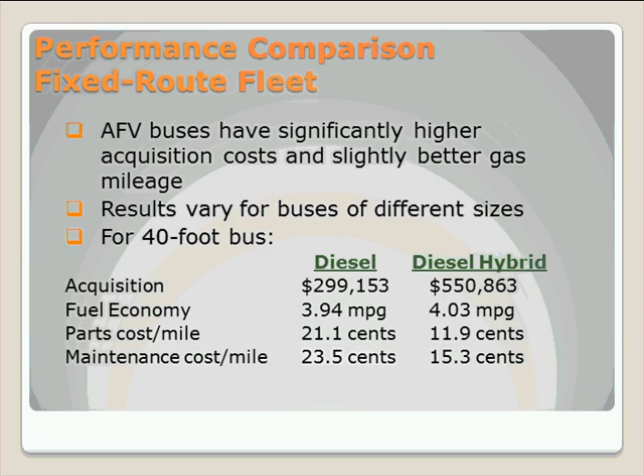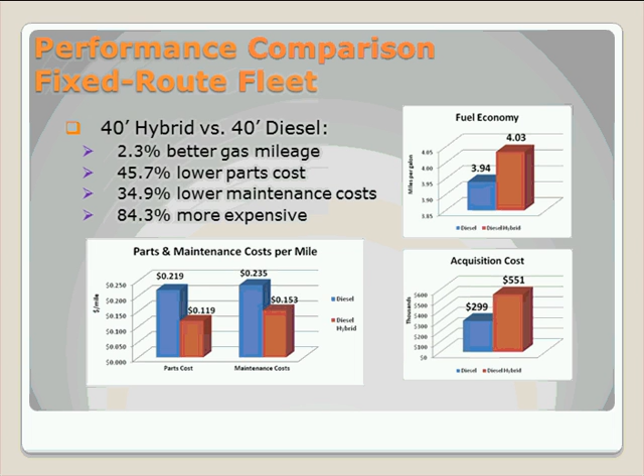Now this is the same data in relative terms, in percentage terms, not actual numbers. In relative terms, the hybrid buses provide about 2.3% better gas mileage. They also have 45.7% lower parts cost and 34.9% lower maintenance costs than diesel buses, while at the same time the hybrids are 84.3% more expensive to purchase. So this is the comparison for 40-foot buses.

Now, if you look at the entire fleet of diesel and hybrid buses, regardless of size, you'll see that hybrid buses are on average 5% better on gas mileage compared to diesel. The hybrids also provide 57% lower parts cost per mile and 36% lower maintenance cost per mile, but at the same time they cost more than double compared to diesel.

But we also had to account for the age of the bus. It turned out that the hybrid buses are also much newer than the diesel. The average age of a diesel bus was a little over 6 years versus less than a year for diesel hybrid. So this can explain some of the variation in performance.

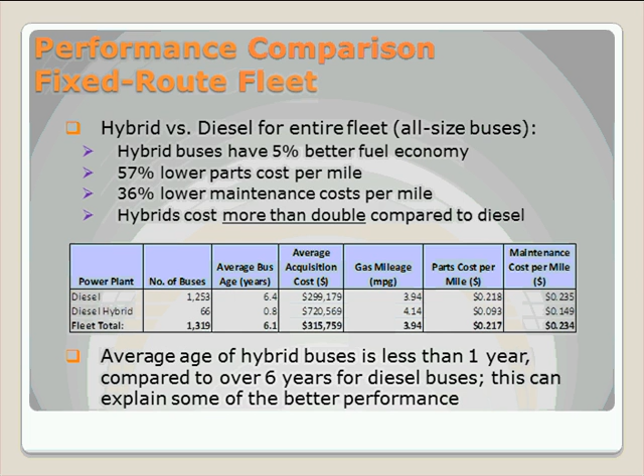In addition to data on fixed route buses, we also tried to collect relevant data on demand response vehicles. Unfortunately, the data on performance and operating costs of demand response vehicles were not available. So all the data for paratransit vehicles was obtained from the statewide vehicle procurement system, called TRIPS. The TRIPS database has a lot of useful data on paratransit fleet, including fleet characteristics and vehicle acquisition information, but there are no records on operating costs. As a result, the analysis of paratransit fleet is a little bit limited.

The data on paratransit fleet is presented separately for vehicles acquired with and without federal assistance, as they are distinguished like that in the database. Vehicles acquired with federal assistance are designated as the FTA Section 5310 program, and those without federal assistance are non-5310.

For vehicles acquired with federal assistance, gasoline fuel was more popular than diesel. There were twice as many gasoline-powered demand response vehicles reported in the database than diesel. The data also indicated a trend of increasing percentage of gasoline-fueled vehicles in annual acquisitions from 2007 to 2011. For example, if in 2007 the purchases of diesel and gasoline vehicles were split 50-50, in 2011 these purchases were 8-to-1.

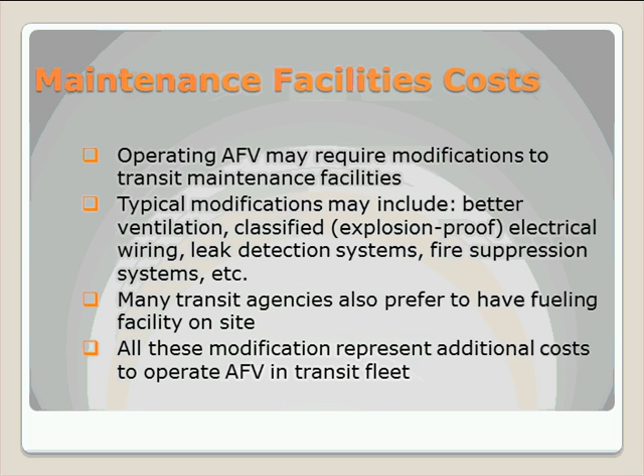We'll start with battery electric vehicles. The main consideration in maintenance of battery electric vehicles relates to handling batteries and high voltage electrical systems and cables on board the bus. So the requirements for battery electric maintenance facilities are: garages need to conform to NFPA requirements regarding handling high voltage electrical wiring and equipment; high ventilation rates are recommended for battery storage locations; smoke and heat detectors near charging stations are also highly recommended; and the fire detection and suppression systems need to be upgraded to be compatible with electrical fires. These are the standard recommendations found in the literature for battery electric vehicles.

For biodiesel, since it's simply diesel fuel produced from biological sources such as soybeans, vegetable oils, animal fats, and so forth, no modifications to maintenance facilities are really necessary. Biodiesel vehicles can use the same infrastructure as regular diesel buses.

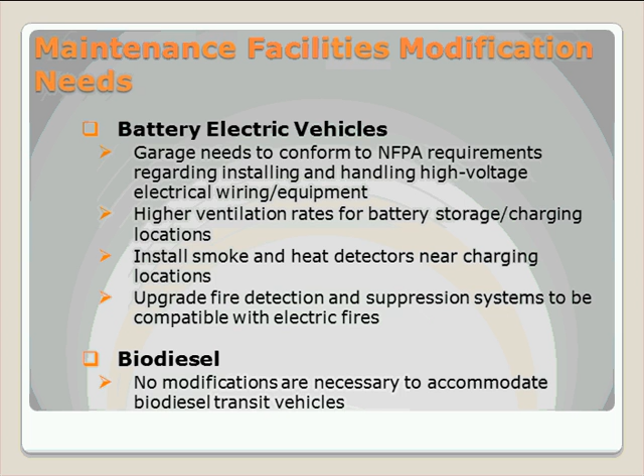Operating compressed natural gas vehicles typically requires improved ventilation rates. The number we always find in the literature is that the ventilation rate has to be at least 6 air exchanges per hour, enough to disperse potential leaks. Then, same as before, gas leak detection and fire suppression systems are needed. Roof ventilators are also recommended, since natural gas is lighter than air and will tend to accumulate below the ceiling in case of a leak. So these roof ventilators are highly recommended everywhere in the literature.

Since there are no generally accepted codes and building standards for CNG garages, it's complicated to estimate the cost of maintenance facility modifications, so the numbers presented here are not very precise. The average cost to modify a maintenance garage for CNG found in the literature is $600,000, but it may vary substantially depending on circumstances. This is pretty old data—the estimate is based on an FTA report released in 1998, so things could have changed since then. The average cost for a CNG fueling station for a typical 200-bus fleet is about $1.7 million, but again, this can vary substantially depending on different factors.

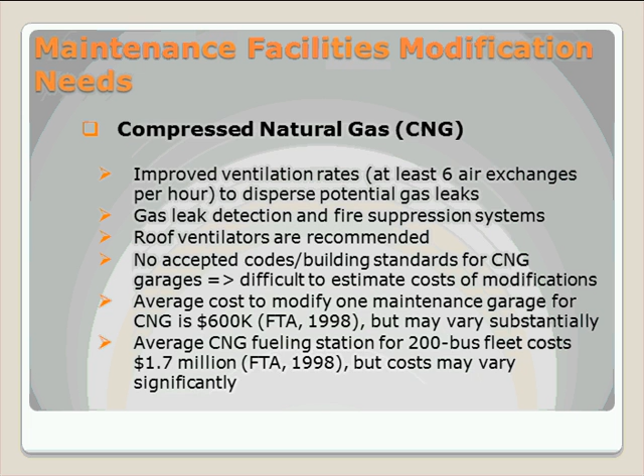Ethanol is more volatile than diesel fuel. Therefore, design and maintenance facilities should include adequate ventilation to disperse potential leaks. There are also recommendations for installing classified wiring at elevations lower than 18 inches above the floor, because ethanol is heavier than air and tends to stay close to the ground. In general, there are the same requirements as for methanol, which we'll talk about in a minute. The average cost of modifying a typical 200-bus maintenance garage for ethanol vehicles was about $300,000, and again this is pretty dated information. Fuel station conversion to ethanol may cost anywhere from $21,000 to $400,000—these are the different minimums and maximums found in the literature. So as you can see, there's a huge potential difference depending on different circumstances and factors. This is very uncertain.

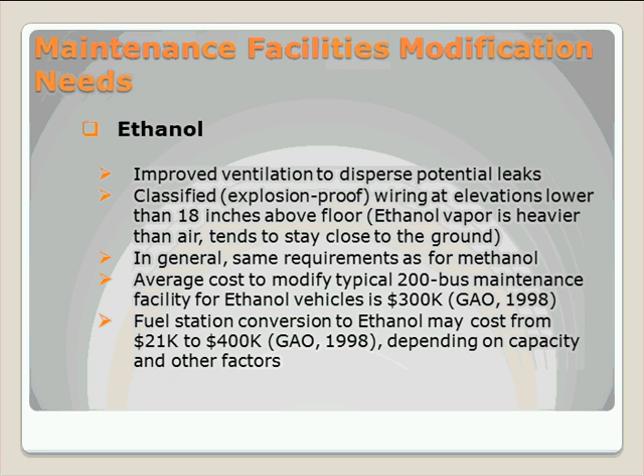Hybrid electric vehicles. The maintenance of hybrid electric vehicles involves changing batteries approximately every 3 years. Therefore, the maintenance facilities may need to be upgraded with lifts and cranes to handle the replacement of batteries.

The older lead acid batteries need to be reconditioned every few months. The charging or conditioning equipment can cost a significant amount of money. For example, New York City Transit reported this equipment cost them $50,000, but there isn't a lot of information on the average cost, since this is based on just one report from one agency.

The same requirements also apply to hybrid electric vehicles as to the other alternative fuel vehicles previously discussed, such as improved ventilation, heat and smoke detectors, additional safety equipment, and training needed for maintenance staff to handle high voltage electrical systems on board the bus.

Hybrid buses use the same fuel and infrastructure as regular diesel buses, so there's no fueling facility modification needed to operate and fuel the hybrid buses—they can use the same fueling stations as diesel.

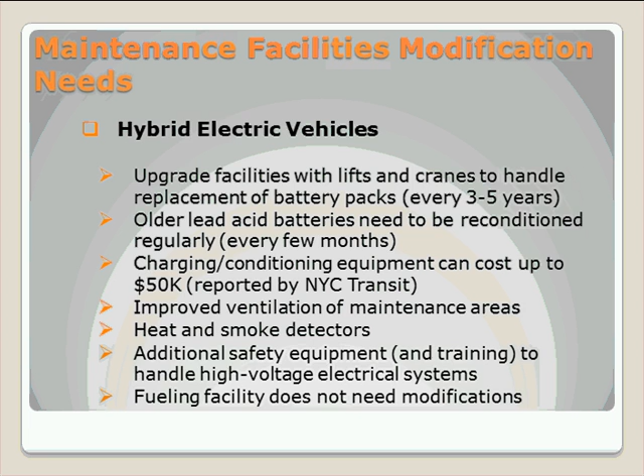Hydrogen fuel cell. Many requirements for hydrogen fuel cell vehicles are similar to CNG vehicles. Hydrogen is much lighter than air and will tend to rise in the case of a leak, staying close to the ceiling. So ventilation strategy should take that property into account, providing for fast evacuation of gas below the ceiling.

We also have recommendations for gas leak sensors, explosion-proof wiring, and improved ventilation—basically the same as for CNG. Once again, the same ventilation rate requirement in excess of 6 air exchanges per hour. We also found recommendations to design facilities to direct hydrogen leaks to the outside of the building. One suggestion is to use movable hoods above the buses that are parked or under maintenance in the garage.

Fuel cell buses are still very rare, and there's very little field data available on cost of maintenance facilities and maintenance facility modifications, so it was practically impossible to estimate how much that's going to cost.

As for fueling facilities, their cost will vary dramatically depending on whether hydrogen is stored on board the vehicle in a compressed state or generated by an onboard reformer from other fuels. So it was also not possible to estimate how much that's going to cost, because there could be drastic variations in costs.

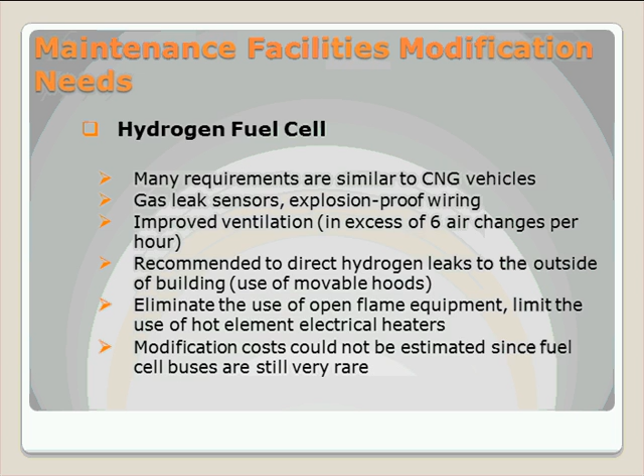Liquefied natural gas. In general, there are similar requirements as for CNG vehicles with some slight differences. LNG is produced from natural gas by cooling it to the point where it turns into a liquid state, so LNG leaks are slightly different from CNG. LNG vapor is initially colder and heavier than air, and tends to stay close to the floor in case of a leak, rising only after it warms up to ambient temperature.

Thus, it's recommended to install only explosion-proof electrical wiring and equipment in all maintenance facility areas at elevations less than 18 inches above the floor. The rest of the requirements are the same as for CNG.

The median cost to modify a garage to make it suitable for liquefied natural gas found in the literature was about $600,000. The cost for the fueling facility varies a lot in different reported costs, but the average cost for an LNG fueling station is about $2.5 million, with an additional $200,000 if you want the capability to fuel with both LNG and CNG.

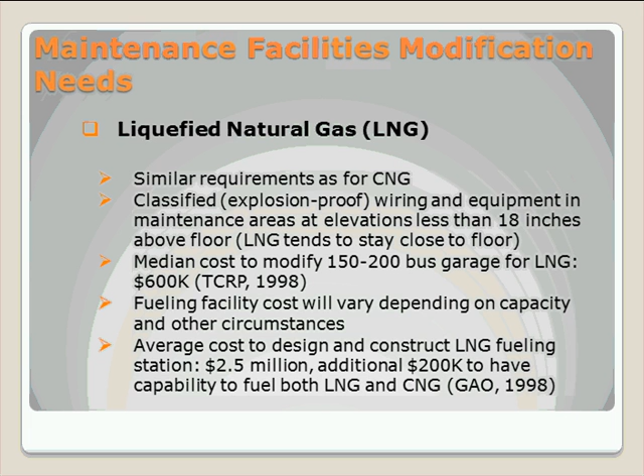Liquefied petroleum gas, the same as propane. The requirements for LPG are typical for most gaseous fuels already discussed: explosion-proof wiring, flammable gas detectors, high rate of ventilation, and so forth. In addition, propane storage facilities must be located at certain minimum distances from buildings, streets, underground tanks, and so forth.

The average cost to modify a typical maintenance garage for LPG was found to be about $300,000. Again, this is dated information, so things could have changed since then. The average construction cost of an LPG fueling station found in the literature was about $700,000.

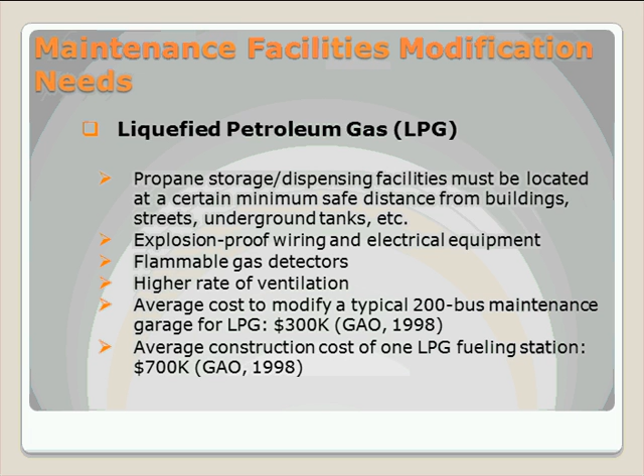And methanol is more volatile than diesel, so all modifications are related to that property of methanol. So the facilities should be designed to eliminate the ignition sources, the high rate of ventilation, as we discussed, as was relevant for other fuels, is going to be relevant for methanol as well. In general, all the requirements are very similar to the ethanol vehicles that we already discussed.

The average cost to modify a typical garage for methanol runs about $300,000, and the average cost to modify a fueling station to be able to fuel with methanol is about $400,000.

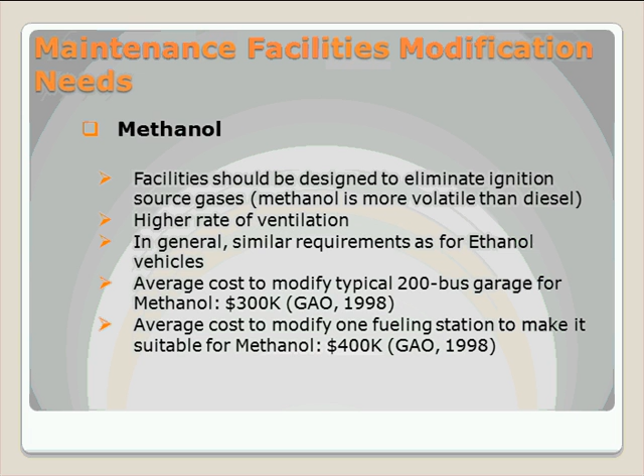Looking back at this interesting and I think very useful analysis, I would like to list some of the challenges that we faced. Some of those were already mentioned earlier in the presentation, but I will repeat them again. The greatest challenge in performing the analysis was related to the availability of data.

We were also unable to establish ongoing data collection and reporting, which we tried to get quarterly. Then there was also a limited number of alternative fuel vehicles in the fixed route fleet. As we said, only 5% of the Florida transit fleet is alternative fuel vehicles.

Then we also saw a low variety of alternative fuel vehicles. In fact, all of the alternative fuel vehicles were diesel hybrids. We would like to see some variety there so we could compare different technologies between each other, but unfortunately we could only get information on hybrids.

And then we also could not get the operating cost data for paratransit vehicles, and none of the paratransit vehicles that were reported in the TRIPS database were alternative fuel vehicles. So although we could get some data on the paratransit vehicles, none of those were alternative fuel.